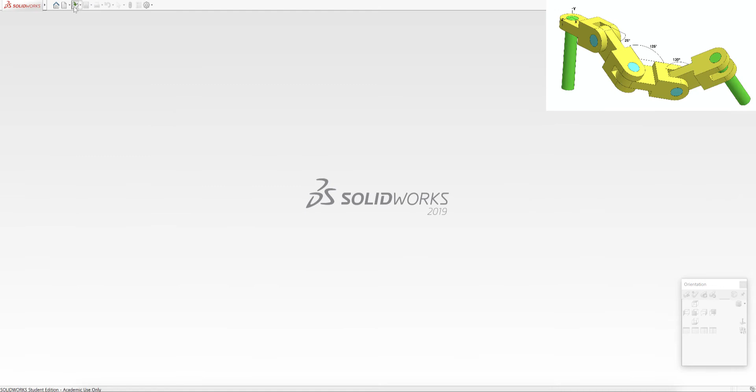To create this model, I've downloaded pre-existing part files from the SolidWorks CSWA website under the Sample Exam option.

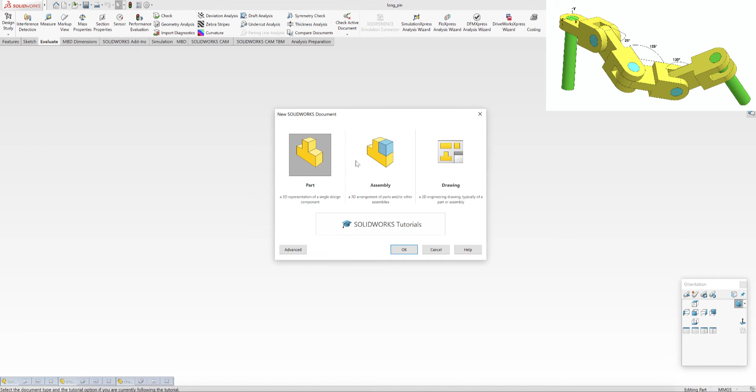Using these parts, I'll be creating an assembly file. All CSWA exams have assembly-based questions where you have to accurately calculate mass property information. In the menu to the left, you can see the 3 part files I have open.

I've selected the pin at the top so that the menu stays in place while I bring in all of the parts that I need for this model. I intentionally selected the long pin first because I want that pin to be fixed in place, because later in the video I'll be setting up a coordinate system on that pin.

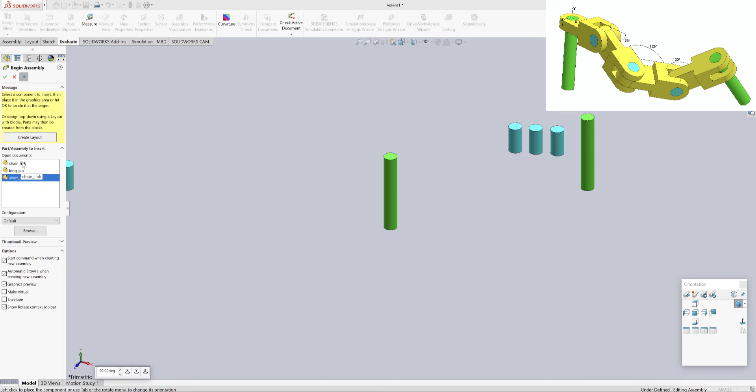Now that I've inserted all of the parts needed for this assembly, I'm selecting the green check mark to OK that I'm done with that menu.

Next, I'm double checking to ensure that the green pin that I put down first is fixed in place and not floating. Before I begin mating these parts, I'm moving each part individually closer to the part that it will mate with, just trying to get it into position so that when I do mate the parts together, they move together seamlessly. Since I want the chain link part to move about the pin, I'm going to create a concentric mate.

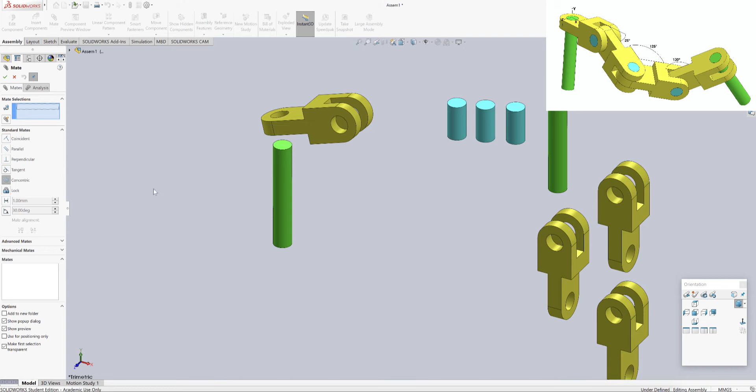Next, I'm creating a coincident mate where I'm mating the top of the chain link face to the top face of the pin. Since I don't need the smaller pin to rotate within the chain link, I'm going to create a coincident mate between the edge of the short pin and the edge of the chain link.

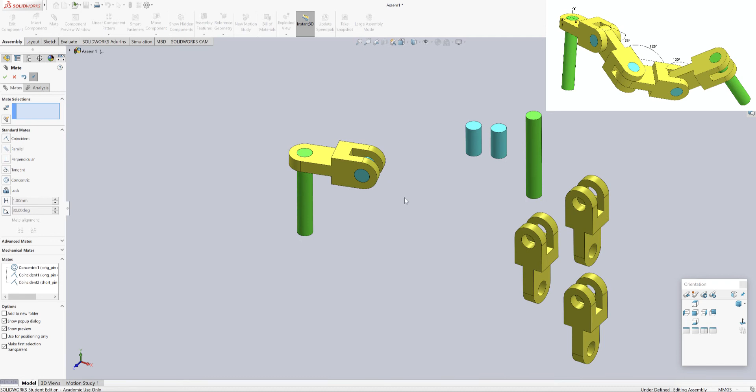While I continue mating these parts, I need to ensure that the chain link parts are concentrically mated with the short pin, allowing the chain link to freely rotate. I'll also continue to mate the exterior face of the inset chain link to the interior face of the outset chain link to properly align and secure both parts in place.

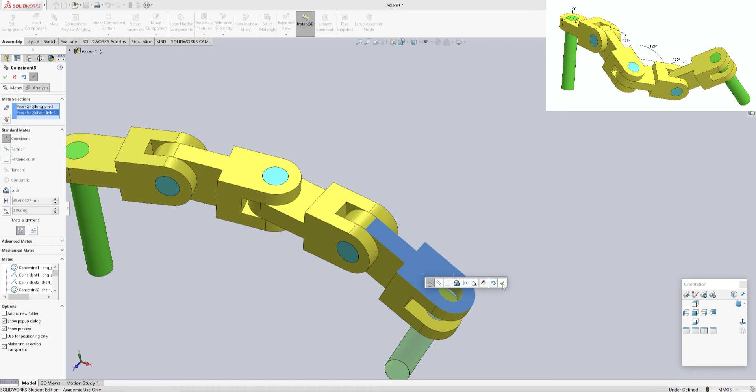Now that I have all of the parts properly mated, I'm going to create a coordinate system to assist with calculating the model's center of mass.

To begin this, I'm selecting reference geometry and then a point, and placing that point in the center of the top face of the first pin that I have fixed in place.

Next, I have selected reference geometry coordinate system to create the actual coordinates that I want to use for calculating the center of mass. So with this, I have selected the point in the beginning box, and then I select lines that go in the direction of the X, Y, and Z axes.

And you can see that in the top right image of the assembly that I'm working to create. I've had to flip the Y and the Z to be able to get the axes to go in the proper direction.

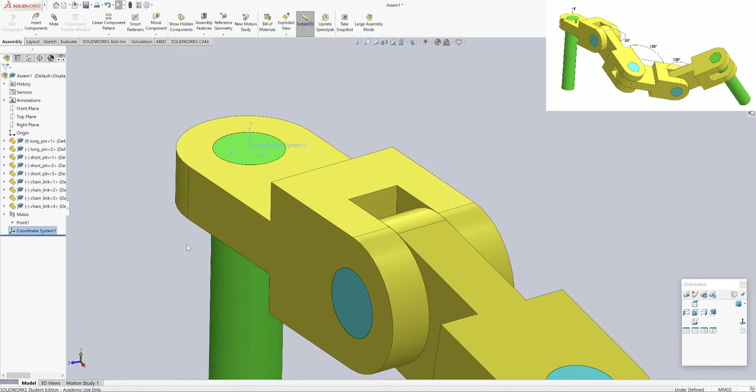I have the coordinate system set up, but when I click away, the symbols disappear, but I can still see both the point and the coordinate system listed over in the Feature Manager.

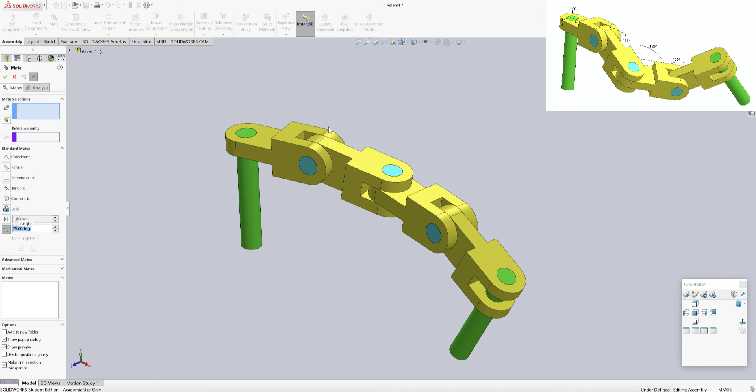Next, I'm creating mates that will set the angles so that I can calculate the center of mass. I've selected the angle mate option and typed in 25 degrees for that mate. Then I selected the two lines that will be set at 25 degrees.

And chaos has ensued, so now I'm going to select a few mate flip and mate alignment options to be able to get that assembly into the correct formation according to the picture in the top right that I'm working from.

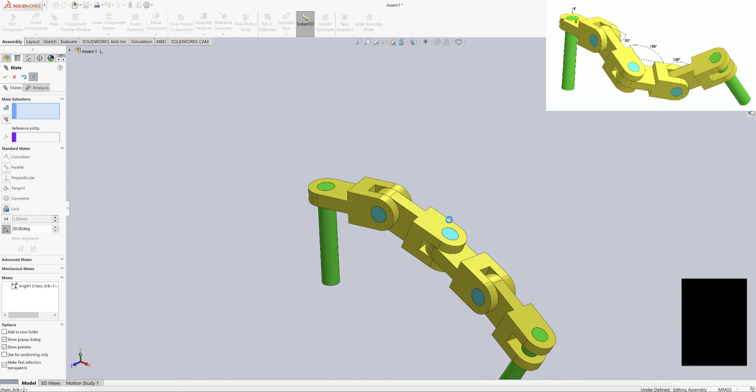Here again, I'm selecting the angle mate option and then selecting the two lines that are next that will be set at 125 degrees.

I'm also having to reselect different mate alignment and mate flip options to get the assembly to orient in the correct direction.

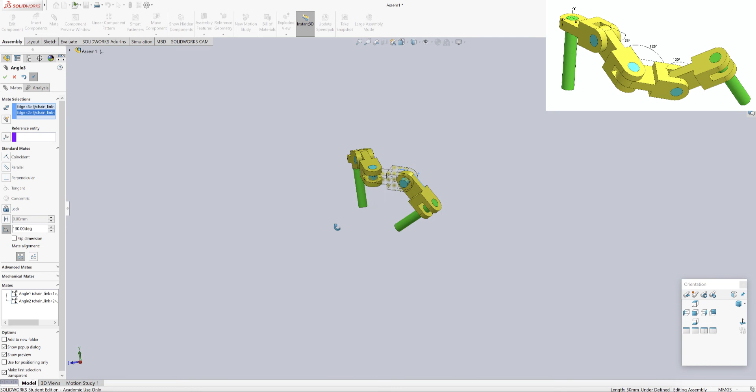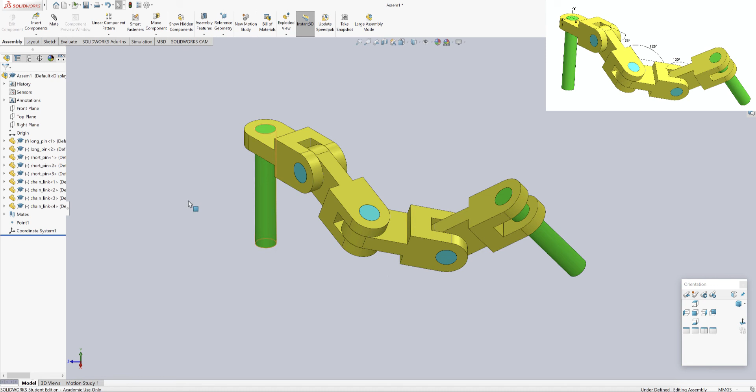Now that I have the assembly complete and it looks very similar to what's in the image in the top right, I'm going to evaluate mass properties, and I need to set the coordinate system not to the default, but to the coordinate system that I created.

And this will give me my center of mass calculation.

This concludes part 1.

In this part of the tutorial, I'm just going through and editing the mates, specifically the angle mates that I created.

I'm updating the degree of angle as it relates to the image in the top right.

As with the other questions in the CSWA exams, they often ask you to create an assembly or a part file, and then the second question to that problem typically is to go back and edit the dimensions, or in this case, degree of angle, to a different number so that it will update and create a new center of mass.

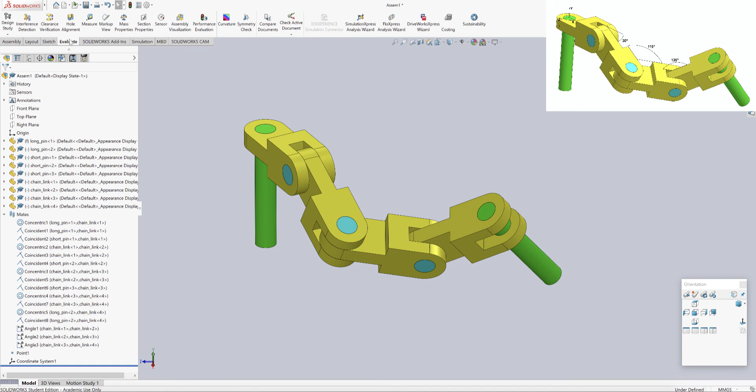Now that I have all of the angles edited, I'm going to evaluate mass properties, making sure the coordinate system that I created is selected, and just seeing what the center of mass is that would answer one of these type questions.

This concludes part 2 and is the end of the tutorial.